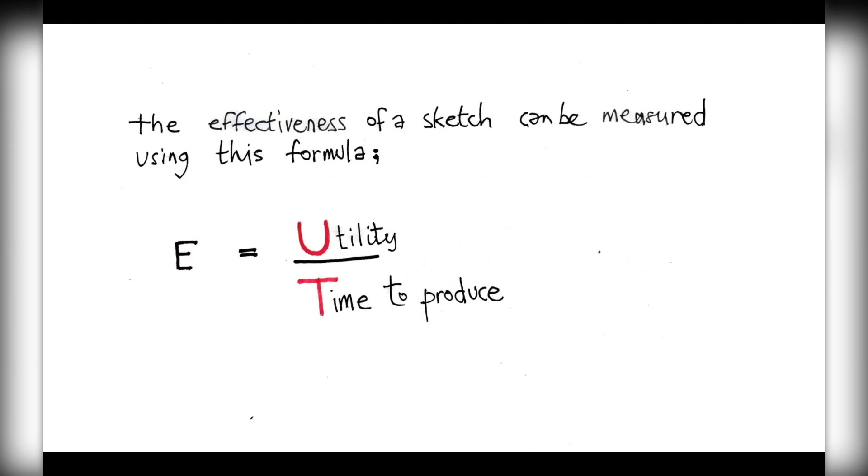This evening is going to be a reflection on the course that Radu and I have put together. It's going to answer or address a couple of questions: How do you teach digital sketching? And what does the digital sketch course for engineers seek to do? Because we will be talking a little bit about the course that we'll be running for the IStructE shortly.

The course itself, we can come to, and we'd like to reflect on the course that we've already run in 3 engineering offices just post-COVID. We're going to reflect on that because it will have direct bearing on the pedagogy of the course, and also the nuts and bolts of how you actually teach digital sketching. So the key points then: what we'd seek to do is raise digital sketch literacy within the engineering community.

What we've found is that digital sketching is being adopted by one or two maverick people within every large company we've worked in, but it's tending to be a bottleneck currently. I think if we were to resolve the technical side of digital sketching, we could give people greater access. So we're seeking to help companies develop a digital sketch capability to suit their needs and budget, and also increase the odds of young engineers adopting sketching as a way of exploring and communicating ideas.

I want to put a strong emphasis on this: during COVID, we fast forwarded about 5 years in what seemed like 3 weeks.

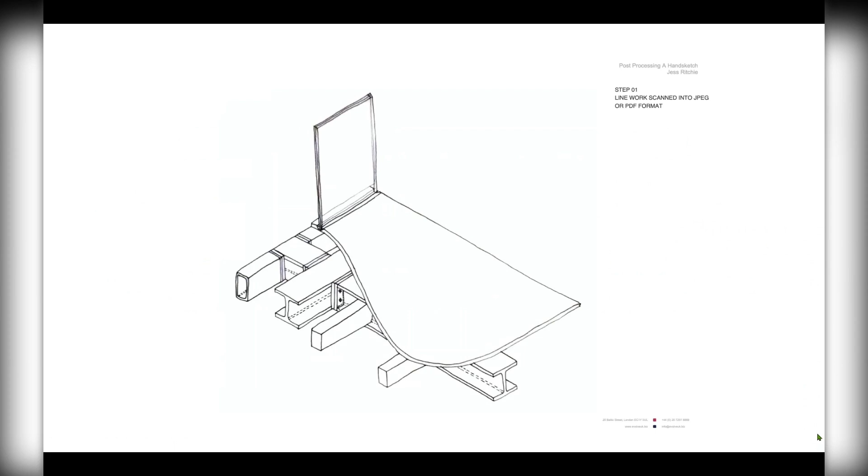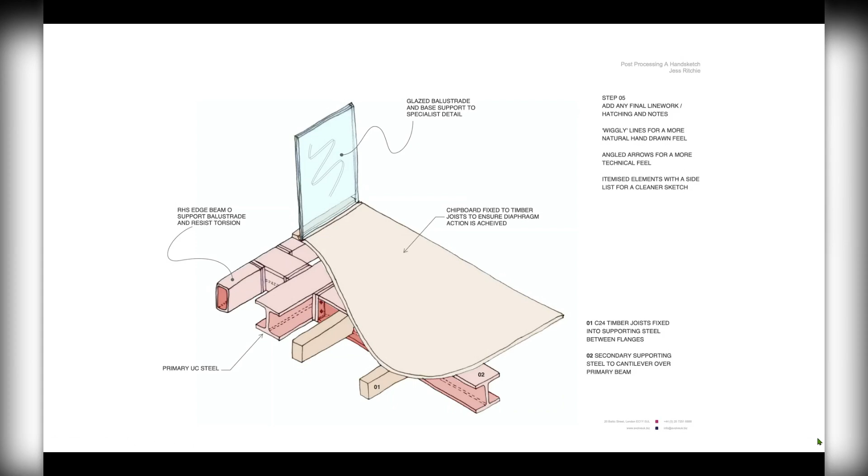So this is a typical example. Now we've got a number of contributors, in the region of maybe 7 or 8. I wanted to just give them a name check at the end rather than go through them, but if it comes up, that's how it is. So these are images produced by Jess Ritchie, an engineer at Evolve, and these are examples she made to show her team how to make a freehand sketch. This one, I think, she was post-processing a hand sketch.

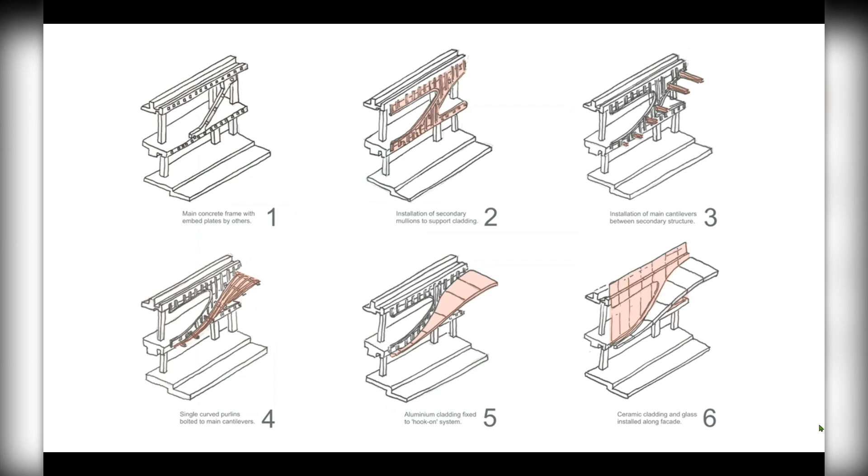This is a similar approach—Alistair Frost at Eckersley O'Callaghan, and this was a construction sequence of a facade. He's a facades engineer. These are almost always annotated in Bluebeam. What we're seeking to do—because Bluebeam wasn't developed as a sketching tool, it's much more to do with markups—is ask, is this the best way to adopt digital sketching? It's perfectly fine, but it's also constricting in some respects.

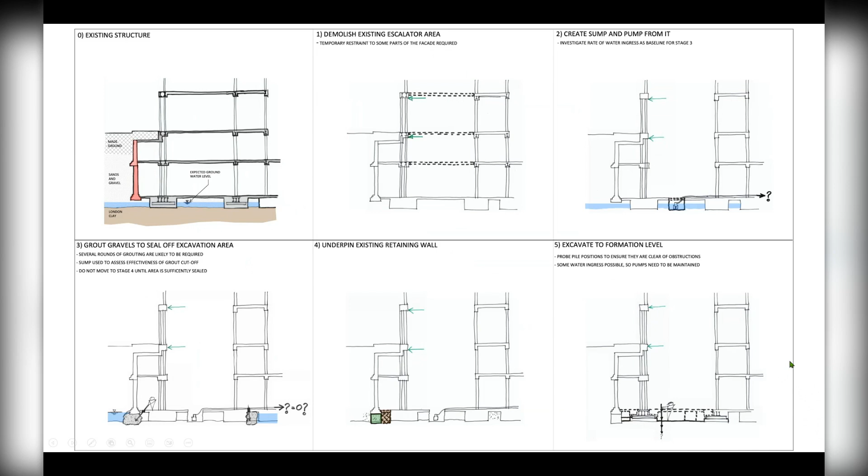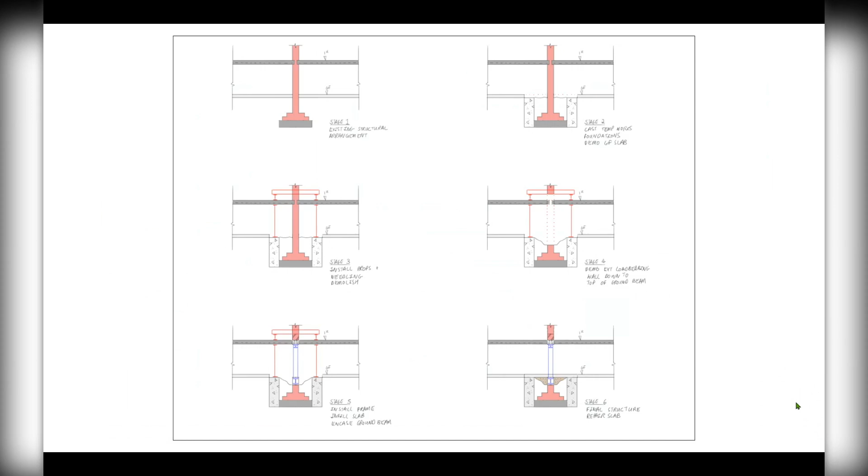This is a similar approach—Di Ravenscroft at Civic Engineers, and this, I'm sorry, this is Simon Bennett. This is scanning existing freehand drawings of a construction sequence, then annotating and coloring. This is Di Ravenscroft, and these are all done digitally—largely using Sketchbook Pro.

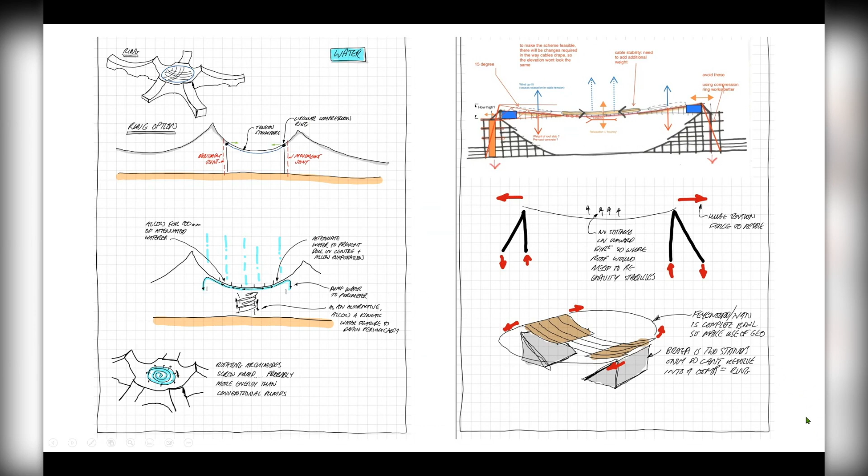These are from Rob May of Buro Happold, and he uses GoodNotes. He does have Sketchbook Pro and Concepts, and he's dabbled with them, but he hasn't fully committed to them. He made the transition from notebooks to iPad some time back, and he's now got hundreds, if not thousands, of notes—keeping one every day on projects, almost like a work diary. He also says he uses it to get a handle on things, to simplify them down, to come up with the essence of ideas. So these are a few from his iPad, and you'll see he's also importing images and drawing over the top of them—these are typical examples.

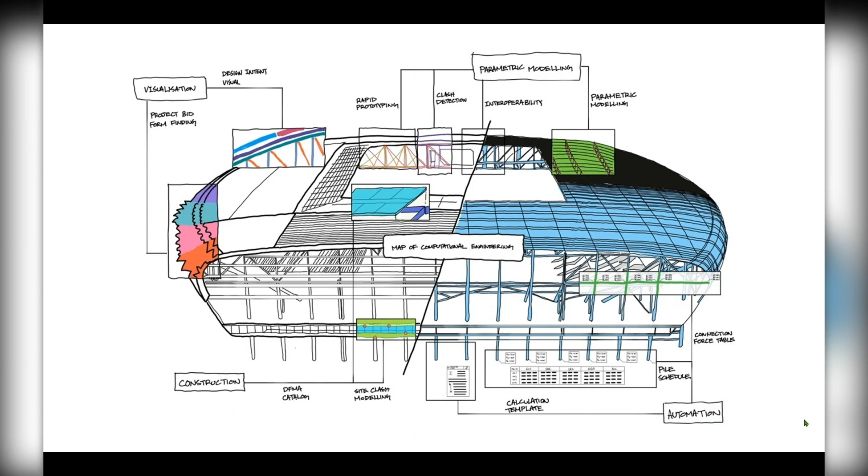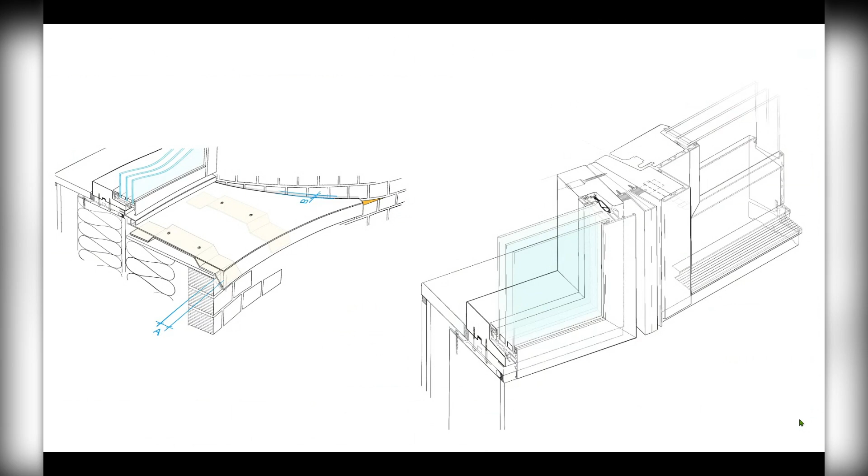And if we can take a look at the next images.

So how do you teach digital sketching? I guess there are as many different answers to this as there are stars in the sky, but all we wanted to do was say that this is still a kind of heuristic teaching model that we're working with. We've worked with 3 different companies, and there's usually around 12 to 20 in the group.

Now, the key thing about this is that it's subject to how many machines you can get out simultaneously in the office for people to work on. And we've worked on a range of devices. We worked initially with all kinds of different devices - we've worked with Surfaces, we've worked with iPads, we've had Wacom tablets.

So what we're saying is we work out through iterative practice, and that's our iterative practice, the simplest way to access digital skills. And here we're trying to find a synthesis between not knocking people out with a massive technical burden, but actually finding ways that we can work through these things intuitively.

And so we developed a course featuring 4 or 5 simple tools, which Radu will tell us about, that can be mastered through deliberate practice. Now, the emphasis is - I can't put this strongly enough - that it's mastered through deliberate practice. In other words, you don't try and squeeze this into your day job. You stop and you learn these skills from the ground up.

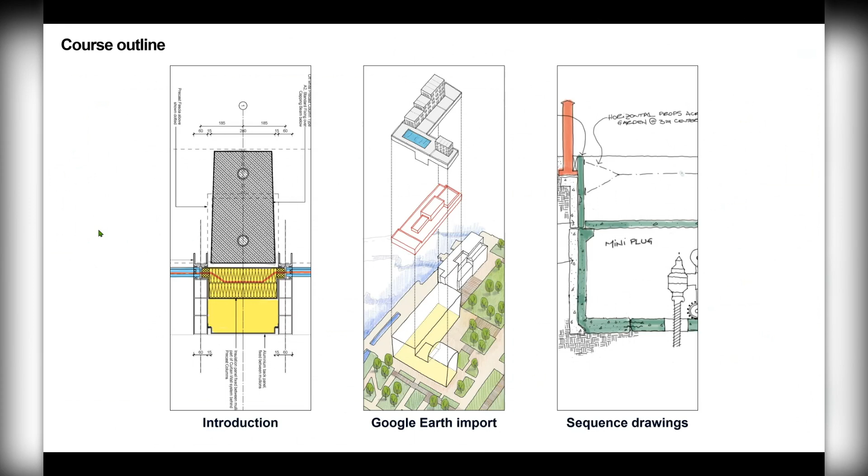And on top of all of these 4 tools, there's the superpower of having an undo button, where if you've mistakenly drawn a line at some point, you can undo back past it, compared to using an eraser or something more in the traditional environment. So I think those are the main 5 tools and techniques that we're trying to encourage everyone to use and make use of.

Okay, great. So these are a few examples of the techniques in practice - like getting introduced to the tools themselves, and how to color in, how to highlight specific areas of a drawing, and annotate and highlight elements from it.

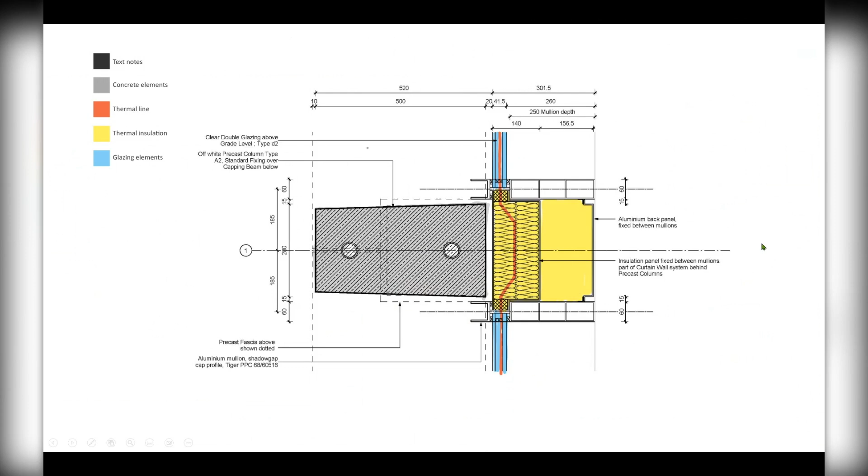Then we're going to a construction sequence. This is like a sequence drawing that talks about process, and also shows everyone how to reuse content from the same drawing - like you multiply and distribute on the canvas.

So this is the natural successor to working with tracing paper. And so what we're saying is that there is a natural and intuitive move from the tracing paper psyche, if you like, or tracing paper way of thinking about things, where the iterative process is pulled through successive layers.

Obviously layers are now digital, and working with layers means you have the ability to mass produce images. So in terms of a process diagram like a construction sequence, you will have your base layer, and then you can cut and paste that base layer into the next layer, and show the progression of an idea as it goes from existing through to proposed in a construction sequence.

So these are classic things. In the course, we run a whole session around process-based drawing, and establishing a narrative through a progression of something happening - like a spot-the-difference kind of approach to telling a story.

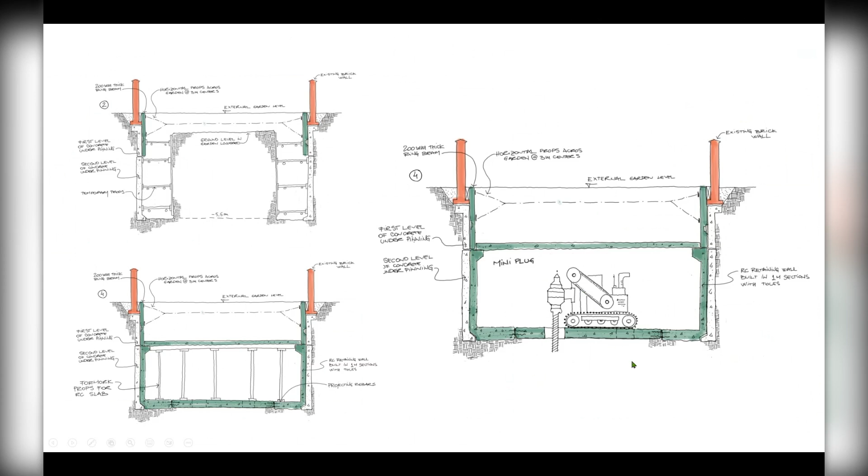Now, this is something—can we freeze that for a second, Radu?

This is something that came about through the Drawing Gym course, in response to what engineers have told us. We asked what would be a really useful thing to do, and some engineers suggested being able to sketch directly over live imagery in meetings, possibly over satellite photos. So part of the course is we give you coordinates in Google Earth—you find the coordinates, we nail the coordinates, we rotate the image, and we sketch over the top.

If you've got basic drawing skills in isometric, because of the nature of Google Earth, it isn't like a Star Wars perspective—it's an extremely gentle perspective because it's taken from some distance away. So it's just like isometric sketching.

So one of the things we decided to do was develop an exercise where you would take off the old roof and put a new roof on an existing site. So if you want to hit that, Radu, this is the process.

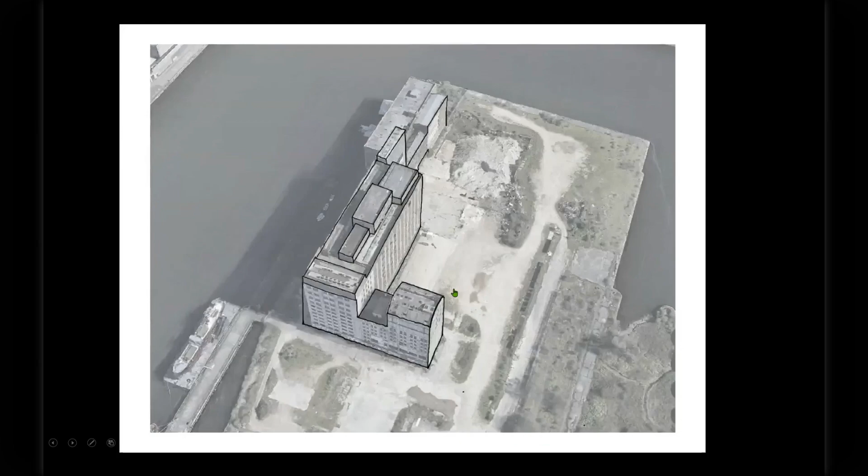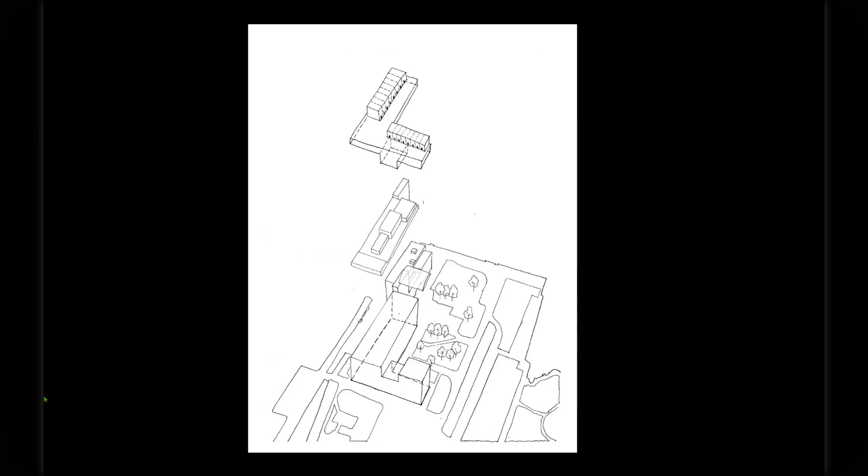So, how to white out the ground once you've established it. There's the context—it can be used by engineers, landscape architects to sketch on the same imagery. It's like a declaration of intent, if you like, when you go to a site. This site could be the other side of the world, and you could still have that kind of conversation.

There you go—that's the finished product. So that's quite an enabling tool.

The thing I'd like to stress is that although we will be pulling in experienced engineers, this is very much aimed as a tool that we'd hope to give to young engineers, and they would basically come up with all kinds of things we had no idea they could do, because there are so many incredible features to digital sketching.

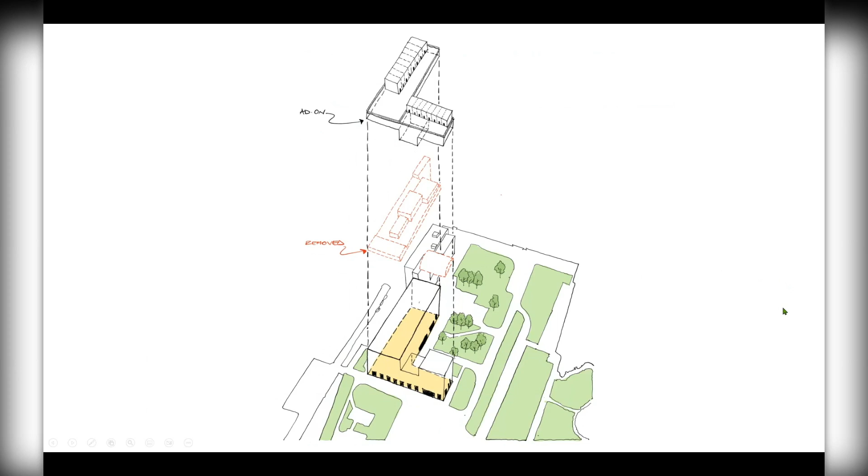Can we move on? What we're also doing is presenting some course support files. Radu, if you wanted to tell us a little bit about those—as part of each individual lecture, you'll get a step-by-step support file that shows the software interface and how you can get from the initial imported image or exercise to the final result, by following instructions that are clearly highlighted.

So it's like a guide—more like an IKEA instruction kit, where at the beginning you start with just a blank sheet of paper, and then at the end you end up with a diagram, having gone through all of the tools and necessary techniques to get that kind of diagram.

I think we felt we wanted to give people as big a chance as possible of retaining this information. Although we're talking specifically about the course we want to run at the iStructE, we're also talking about heuristic teaching models, in that we are doing this in response to students we've worked with over the last couple of years.

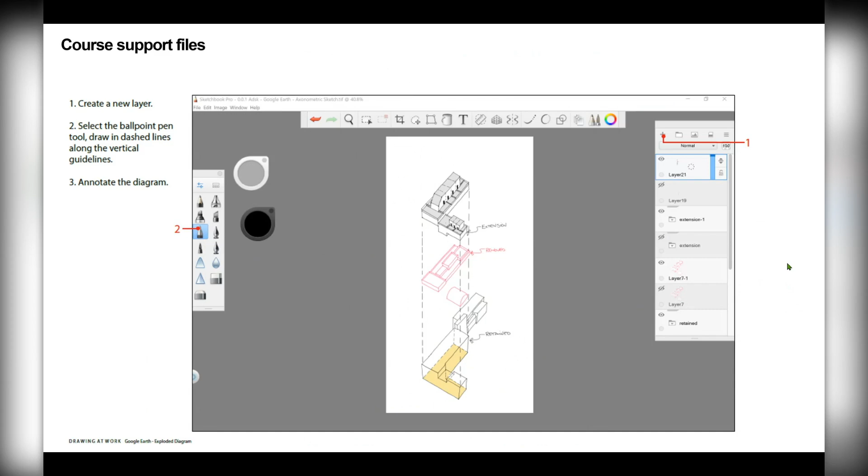So we felt it was necessary, once we'd established an app we were going to work with, to publish some basic support files for using that app, so that you'd never be adrift—you'd never have that embarrassing moment where you had to stop the whole course because of something you've misunderstood.

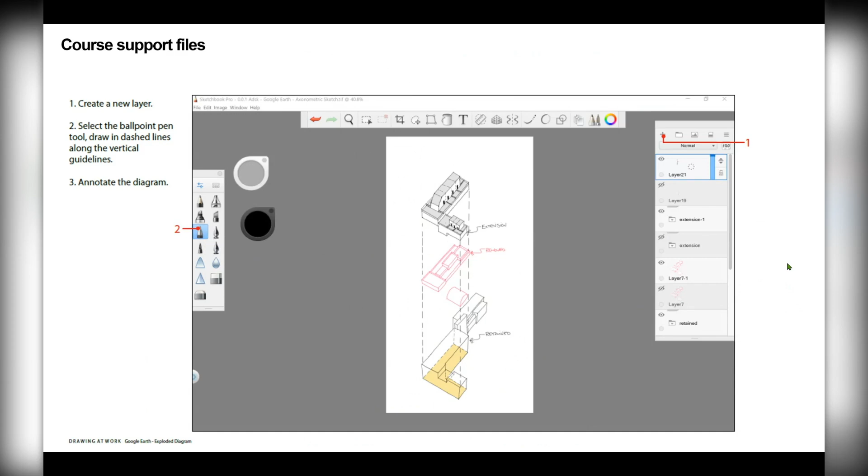So you can have these things on your phone when you're working through this, and they're also going to be worked on a screen. We'll show you some examples of classes we've run, which may help explain it. But Radu's just going to show us a few more sketches.

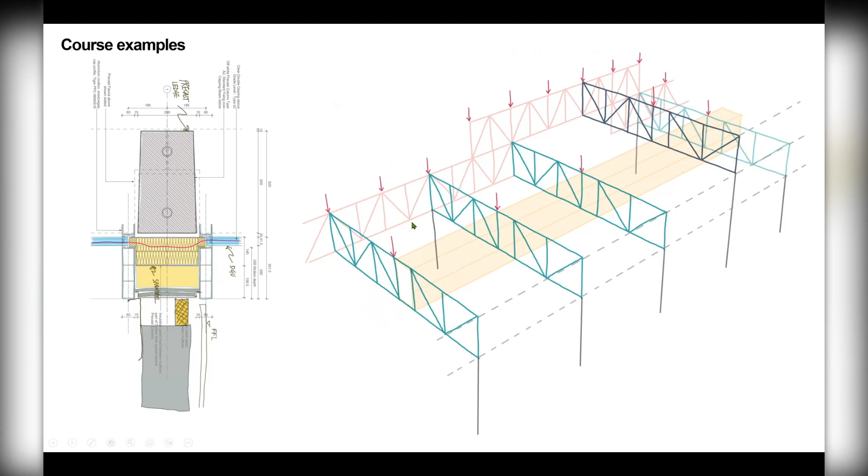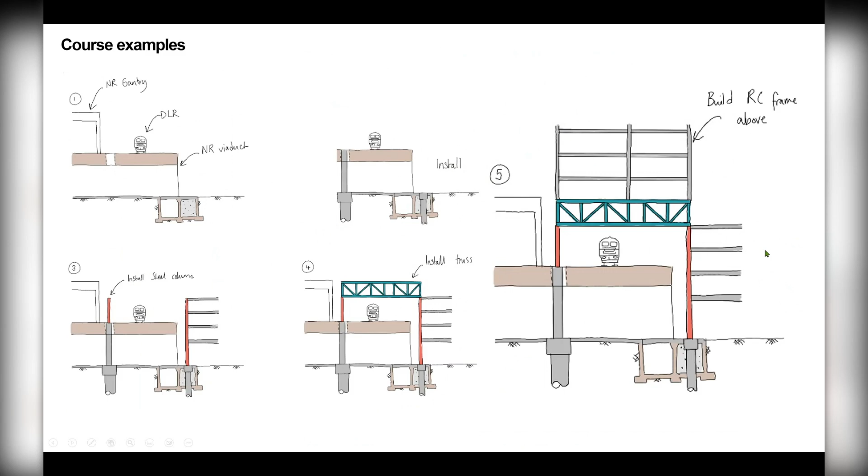On the left hand side is an example from the first course where people are annotating and highlighting parts of the diagram. Also an example of an isometric sketch with trusses using exactly the same techniques but applied on an isometric diagram, done by one of the course participants. These are examples using the kit on construction sequences, quick diagrams using the repeat tool and layers, building up images and showing the changes.

Again, this is the same kind of technique but applied in a different environment. It shows a study section of a balcony in different scenarios, with drainage and without drainage. This exercise was done after the course, and these are examples of how this could be used for different design solutions.

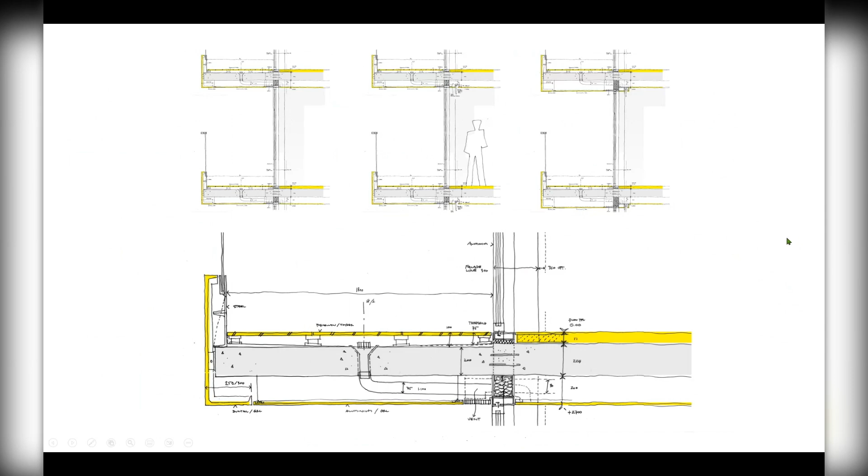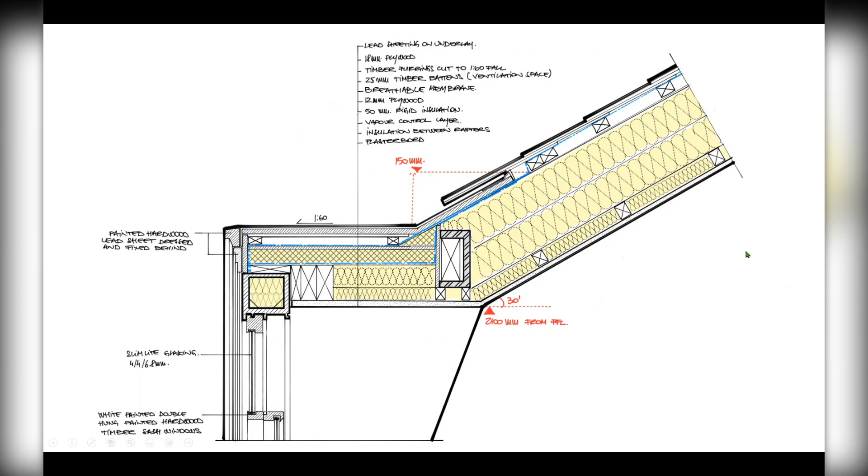Again, a diagram highlighting what I think was done with a hybrid of a sketch directly on a 3D model, where you had the zone available and then could see if everything would work out within the allowed buildup. That's one of the techniques.

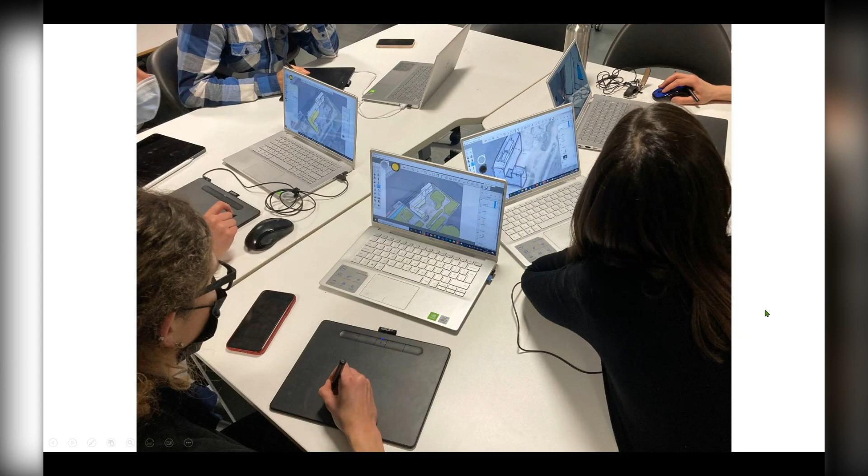Next up was Eckersley O'Callaghan, and in this office they had 20 people. They had some old Wacom pads, and in conversation we said, yeah, we could probably use the Wacom pads. There's a slight disconnect between what you draw and the screen with them, and they can feel slightly cumbersome, but we managed to overcome that.

If you look at the bottom of the screen, you'll see somebody drawing directly on a Wacom that is separate from the screen, while others in the same group were drawing on surfaces that allowed them much more interactive, much more like iPads with Wacom surfaces. This is like a typical scenario, this is how we did it.

This Radu was in, you weren't even in England at the time. No, he was not only in Romania, but he also had COVID, and he was teaching with great dedication and public spirit, but there were lots of people. This was just after COVID, but people were checking in from different parts of the country, and we were running it on Teams as well as live. It's incredibly flexible as a teaching resource to teach digital sketching, so we were quite excited by that.

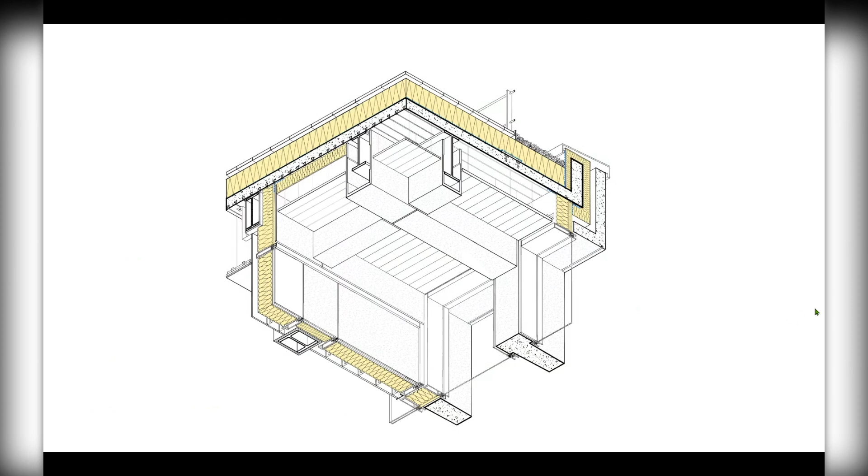These were some examples of other technical details that can be made. This is one aspect I was certainly excited by: you can take something that would normally exist only in a plan or elevation, and in no time at all turn it into a 3D sketch. This compresses imagery, turning it into isometric, axonometric, in much the same way one would with tracing paper.

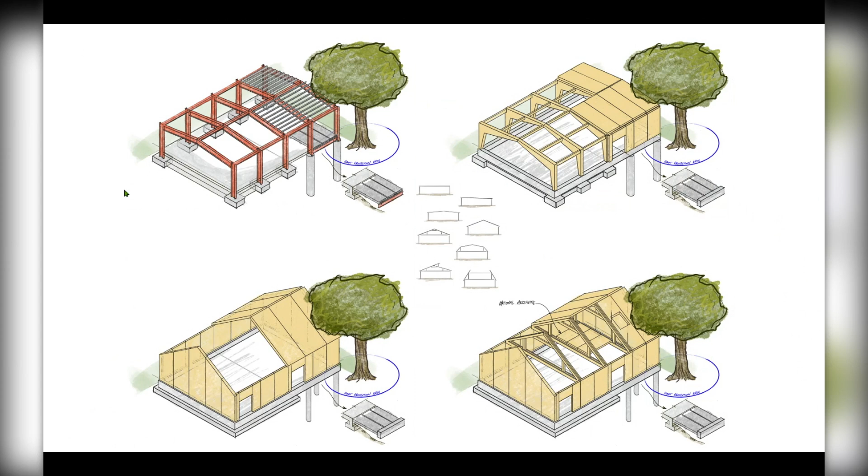These are also sort of conceptual sketches. This was actually for a bid submission for a small building at the end of a long pier. The interesting thing about this was that the weather conditions these buildings could be constructed in were quite exposed, so we wanted to use sketches to convey different ideas on how we could construct the building in different ways to respond to potential weather conditions.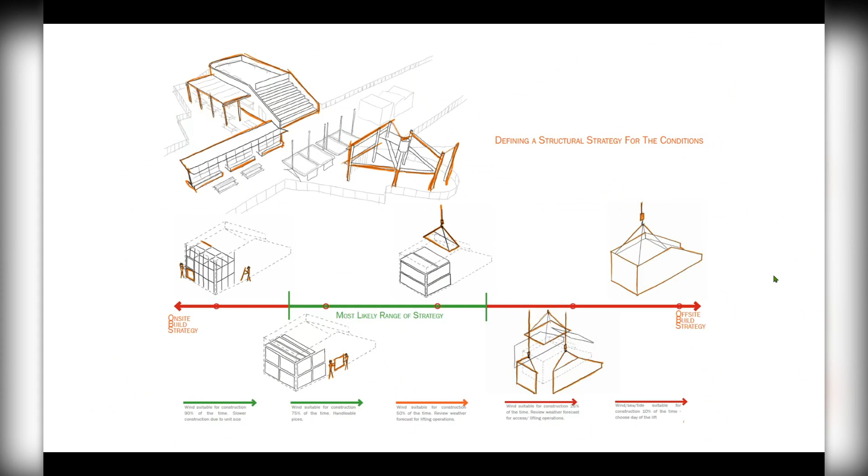With this, I was actually using architectural renders that had already been produced, and I was tracing over the top. I was using our Whitby Wood orange to try and highlight the different elemental sizes that we were discussing in the narrative of this submission. And then I arranged these sketches in Bluebeam, I think.

This is showing some more traditional detailed sections. With these, I used a grid to set the overall scale. I think it's important to always try and draw to a scale.

And these were actually to convey some different party wall conditions that we had in an existing and proposed way.

So again, I was using layers to work up one version of a sketch, and then turning off layers to adjust some details.

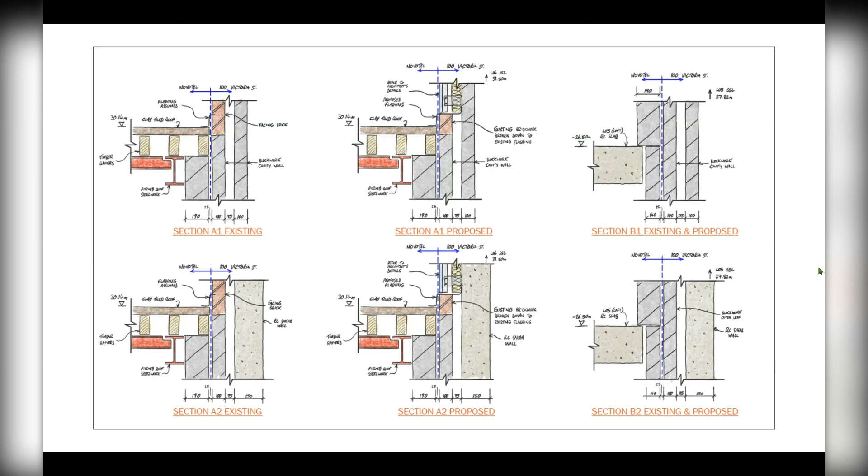I think it was good to have worked out a good color palette to pick out different material types. This could have potentially been done in something conventional like Revit, but we didn't have full information in model form of what the building was on the other side of the party wall, so it was more appropriate to draw these directly from photos, which is why this was a good tool to use.

This is showing a bit of a construction sequence, which required some precise notching work and a slightly unusual sequence to fix this bracket. I was using the isometric grid in Procreate for this, and then I put the notes on afterwards to make sure I'd given them some thought and they were nice and concise, and could be adjusted when they'd been reviewed.

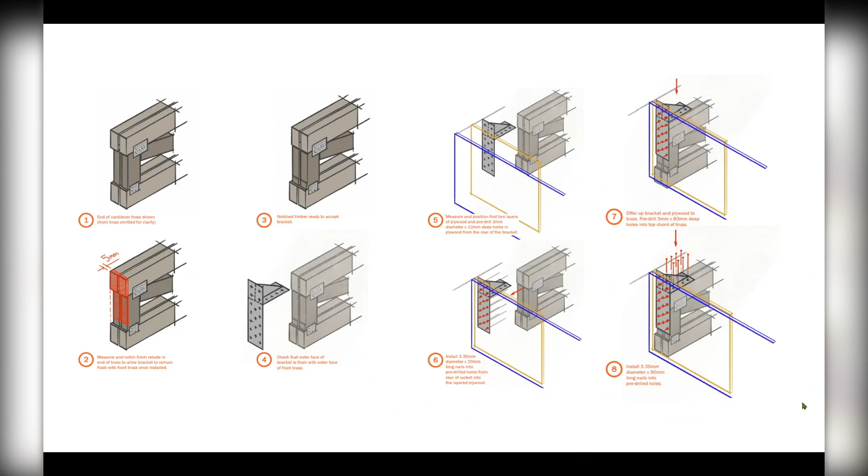Terming this a bit of a conversation starter - these kinds of sketches can be pretty quick to put together, and the purpose was to fire them off in an email to discuss our understanding of how something might be built or how objects would go together. Something I quite liked about this one was finding this nice highlighter-type shader - it looks pretty close to a traditional highlighter.

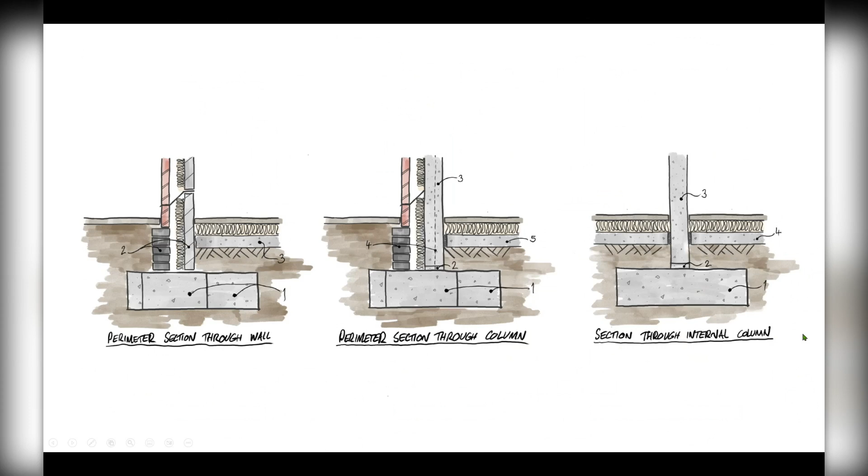The good thing about that one was that I sent it off and the architect was able to just put their comments directly on the sketches and send them back. So it was useful for having a conversation.

This is showing feasibility for an excavation on a constrained site. For this, I used a Revit view which had quite a lot of useful info of the site already, just to give the context of the site and the scale. The thing we wanted to convey was how the plant would move around this constrained site, so I loaded in actual images of plant equipment and set them to the correct scale, then traced over them to create blocks I could move around and place where I wanted, since they'd be on different layers. I used arrows and a few choice annotations to convey the sequence and movements of these bits of equipment.

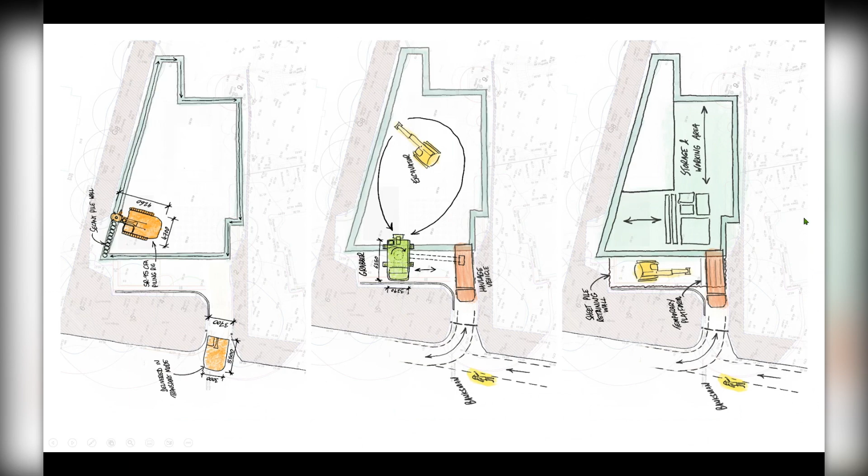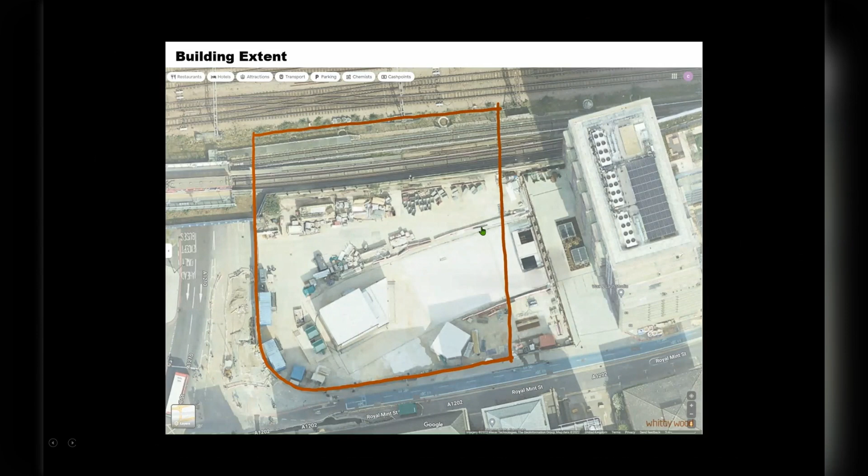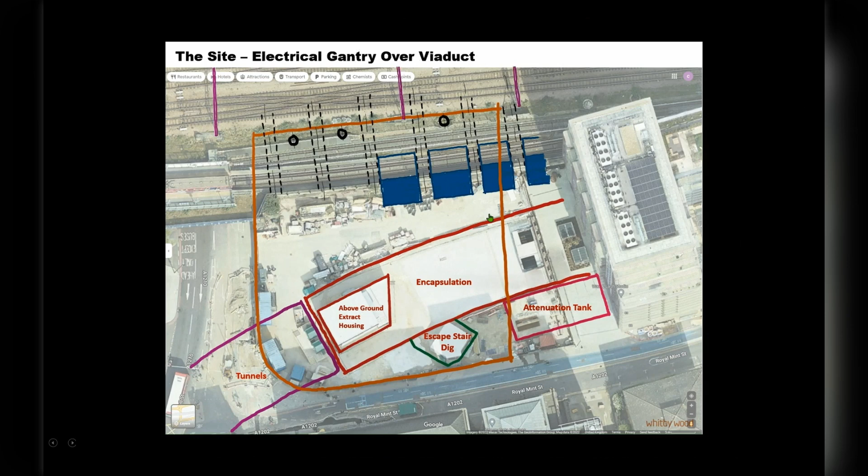This one was actually done in PowerPoint, similar to what Radu was showing earlier - it's a Google image snapshot. We put this into PowerPoint because it's great at copying and pasting something into the exact same space between slides. It's also got nice pen options, so you can set the thickness - a thin pen, a medium pen, and a thick pen. It's great because you're building up a slide deck which tells a story, ideal for subsequent meetings where you're trying to bring people along on a journey and explain the particular constraints on a site. So that's how we've used digital sketching, in quite a practical and quick way.

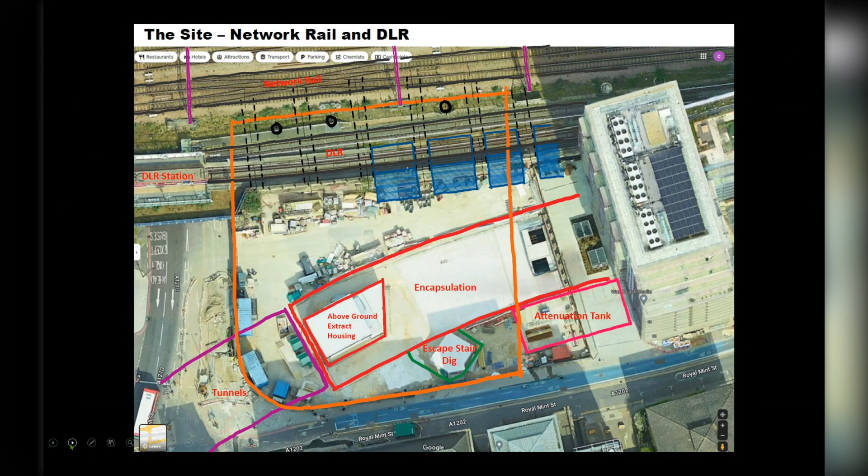Thank you, that's about it for me. Thanks, Oliver.

We wanted to bring the course to a conclusion, and one of the things we'd be reflecting on is our experience of teaching the course, and also the anecdotal evidence we've got of the way people are using this now, compared to how they could be using it to boost output, to boost competitive advantage, and so on. Now, we are doing this through the lens of the course we've been teaching.

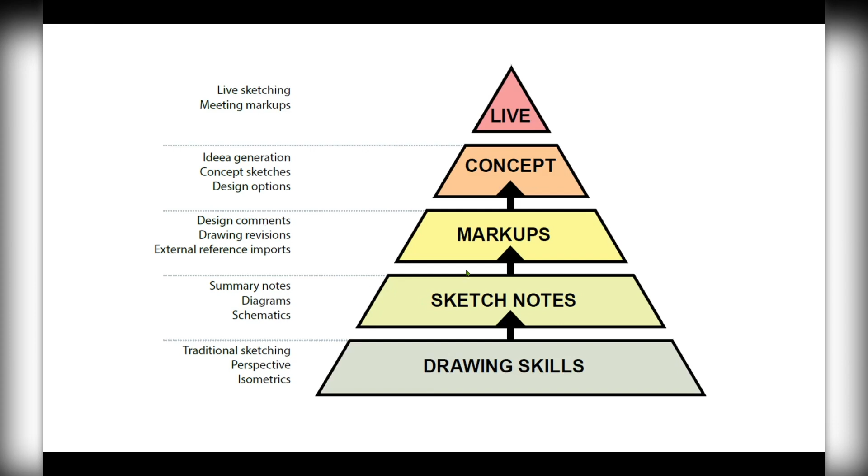So these are some of the options we've found along the way. As I've said, this is anecdotal. We're not proposing how people should be working, but we'll give you a table of some of the options out there and our experience of how people are using them. Sketchbook Pro, a couple of years ago, was around, as was Procreate, Morpholio, and Concepts. But this was the tool initially when we sent out emails to the industry asking what are you sketching with? These were the answers that came back. We haven't gone into this prescriptively - we've responded to who at the time was using what, and said okay, this seems to be the way it's breaking, so we'll try Sketchbook Pro, but we could equally have gone down a Procreate, Morpholio, or Concepts route.

Now this is changing week by week - it's a perpetually changing scenario. We are simply reflecting on our experience over the last couple of years of working in that environment. So if we could go to which device...